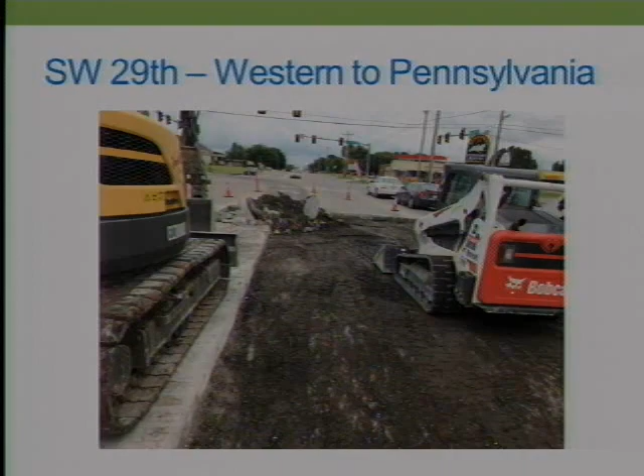I wanted to start with Southwest 29th, Western to Penn. If you recall, this is a 2-mile stretch on Southwest 29th. It goes from Penn to Western and Western to Shields. This project is substantially complete. The only thing we're really waiting on is to finish up some of the striping.

This was a challenging project because, remember when I talked about the different typical sections, this one had a bunch of different typical sections. You have a lot of concrete, full concrete streets, some concrete streets overlaid with asphalt, and then some just full asphalt. A lot of these roads, when they first have a 2-lane, they leave a lot of that stuff that's there, and then when they widen to a 4-lane, they leave the 2 lanes that are different, and sometimes those 2 center lanes will be different than the 2 outside lanes.

So we try to catch that in all of the pre-construction information that we gather. We try to pothole that and figure that stuff out, so we know what we're dealing with before we get in there.

But once we expose a lot of that stuff, we figure out where the patches are needed. This particular project has a lot of drainage on it, so there's a lot of inlet repairs, curb and gutter, making sure there's no standing water.

We also had a cross drain that had issues, which slowed things down a bit, but we got all those things addressed, so it's nice to see that project progress the way it is. Currently it's been repaved and restriped, so hopefully we'll get to add that to the completed list, those 2 miles.

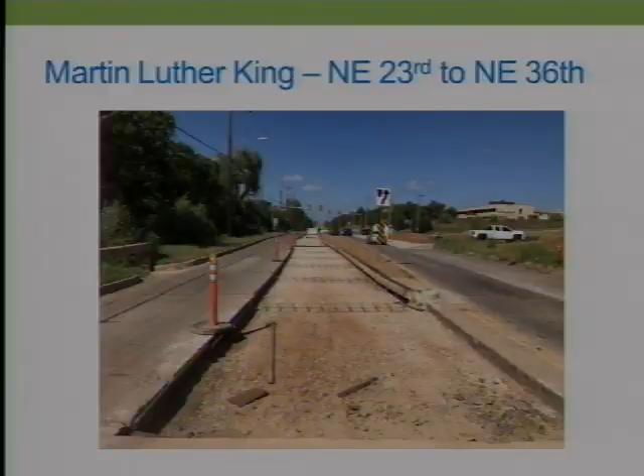This particular project is a good one also, because at Northeast 23rd and Kelley, if you recall, this is one of our street enhancement projects that was approved, and it crosses through MLK all the way down to the Katy Trail on 23rd. So that's a nice tie-in, to get this resurfaced and tie in to one of our street enhancement projects.

And then Northwest 63rd, Santa Fe to Kelley. We had a lot of patching on those, so we did a lot of patching, and it's your typical mill and overlay. You can see on the left side of that picture, the milled surface, and on the right side, they're repaving everything. Hopefully that one will be complete pretty quick too. It looks like they're progressing on that one.

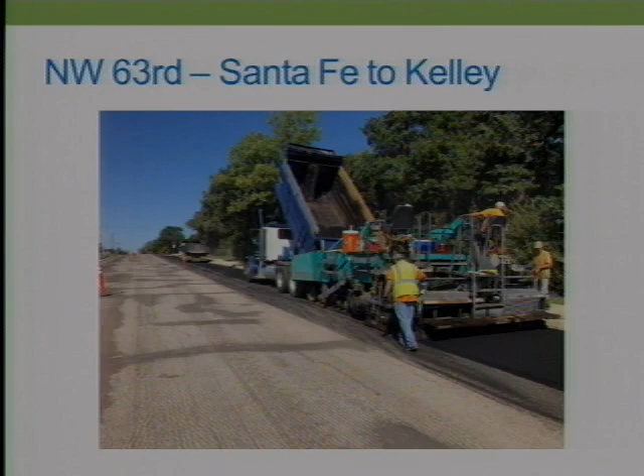Northeast 63rd, Midwest Boulevard to Douglas Boulevard. This was not a mill and overlay, this was more of an overlay project. If the asphalt looks good and seems to be holding up structurally sound, and if there's no curb and gutter and we can add structure to that, we always try our best to overlay it. There was some curb and gutter around the bridge there, so we did a little bit of edge mill to tie that in, but anytime we can have the opportunity to add structure, that gets us closer to our city standard typical section for arterial streets.

And here's one of the neighborhoods going on. We obviously saw a pretty bad area on this one. This particular project, same thing - we'll try not to do any milling, we'll just try to add structure to it. There are some areas of this neighborhood that are in a little better condition, so we'll overlay that part. But in areas like this where it's just gone too far, we'll do more of the full reconstruction like I talked about. We'll incorporate that asphalt into the base, stabilize that material, and come back in with an overlay to tie all that structure together.

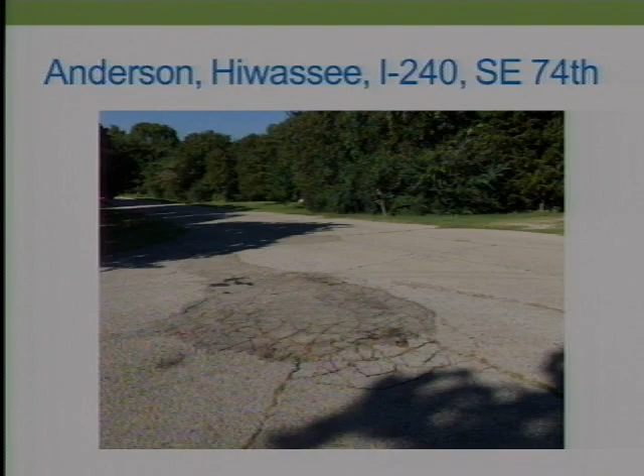And here's another one, Anderson, Hiwassee, I-240, Southeast 74, another residential resurfacing project that we have. This one has a lot of transverse cracking, and on those transverse cracks we try to go in there and crack seal a lot of that stuff and make sure there's no voids, get that cleaned out. In areas where we can just overlay that, that'll be kind of our start of the patching process and transverse crack repair. We'll repair all those things, and then overlay that. This neighborhood also has a few areas that'll probably be full reconstruct, but they've started, and hopefully we'll progress on.

That kind of ends that. If y'all have any questions, I'd be glad to answer those. I have a couple of questions.

So basically, either a full reconstruction is done or mill and overlay. What would be the longevity of life of each one of those?

A full reconstruct, hopefully we can get 20 plus years out of that expectancy. Your typical mill and overlay can go anywhere from 10 to 15 years, and we have a lot of areas that we've done mill and overlays, and it's 20 years later and they're withstanding in real good condition. As long as we can get that sealed off, the idea is as long as we can keep the moisture out of the base, and usually that's what the mill and overlay does.

It's structurally sound material, but weather comes in, and the oil oxidizes a little bit, and you'll get a little bit of cracking, and that opens it up and lets moisture in. If we can get to that and do that mill and overlay, we can get that sealed back off, and it's structurally sound, so you don't have any potholes or anything like that. It will extend the life for a long time. As long as we don't get that weather cracking again, it can extend it for 10 plus years.

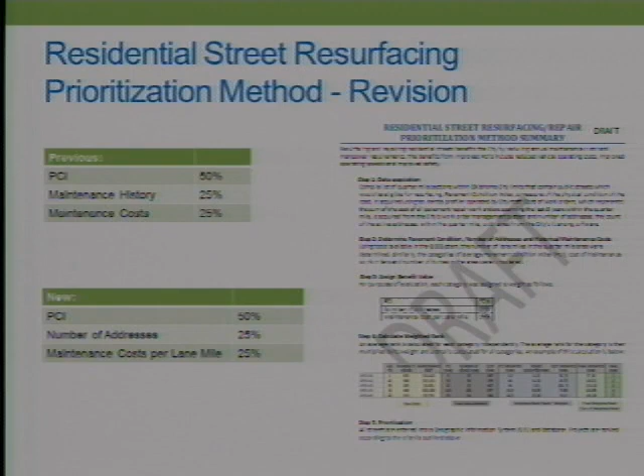As we have maybe neighborhoods that have similar PCIs and neighborhoods that have similar maintenance costs, the neighborhoods that are more dense—i.e. the ones that have possibly higher traffic—we do not measure traffic volumes of residential streets. This might be our way of getting back to measuring the higher use streets for that measure.

You'll see that the percentages have not changed, but the way the methodology works is the same. We can take those PCIs, number of addresses, and maintenance cost, rank them, weight them. We then sum those totals and create that new rank system.

This is going to allow us to present future lists to you as an advisory board for recommendation for additional sales tax dollars moving forward.

There's a few other things we're able to do with the GIS that we mentioned, and one of the biggest changes in the residential is we're going to be looking at quarter section or quarter mile. We had previously used square miles, so all the future lists we have are going to be much more neighborhood centered.

It doesn't necessarily mean that all neighborhoods in a mile need to be resurfaced—we can focus down a little bit finer. With that, I'd like to open up for questions if there's some questions about the proposed changes.

What we would do next is, if there are no changes, we would put this on for a future meeting to go ahead and adopt the revised prioritization, and we would then start presenting future lists using this methodology.

Any questions? Eric, I have a question. So the main difference is taking out the accident situation on the arterial. From the arterial, yeah. Is there a concern about that? Is there any way to put that back into a program situation? Because obviously we felt it originally was important to use that as a barometer.

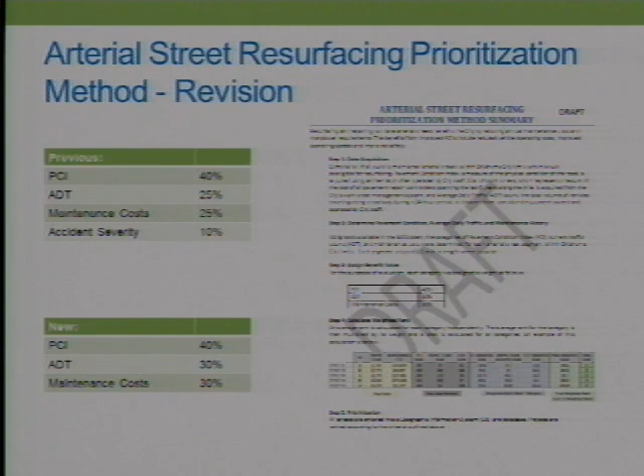The new weighted rank, in addition to the change we're talking about with the software—if you look at that next to last column, the light green column on your form—you'll see that we actually get a more fine creation of the rank. We're going to be able to come to you with better justification that these are the actual ranks: first, second, third, and fourth. We can get to a decimal point with the new weighted system.

So, with that said, I don't think we're going to see an actual impact in the way the streets are listed. Now, all those that had that same 4.7 score, we may see some change inside those with the new system, prioritizing the ones that create that finer score. But again, they're all going to fall near that top of the list still. They're not going to fall to the bottom of the list with the change.

I think the other thing we're going to be able to do with the arterials—previously we were looking at bond streets, specifically bond recommendations that came out of the bond program. The next list that will be coming to you will look at all streets in the entire city network. So no longer will it be just those bond streets. With this new software and some of the methodologies, we're going to look at every street in the system regularly. So there may be some streets that weren't reported previously as being poor that through this new system are going to probably elevate themselves into the list. Just because we didn't get a call doesn't mean it shouldn't be considered or done.

So I don't think you're going to see a lot of impact, and with the adoption, one of the things we can do is show you what that new list looks like. So before the board considers recommending an item for the council to approve, you'll actually be able to see that list, and if it would be helpful, we could show you what the old list was and the new list, and you can make that comparison. So I hope that answers your question. Okay.

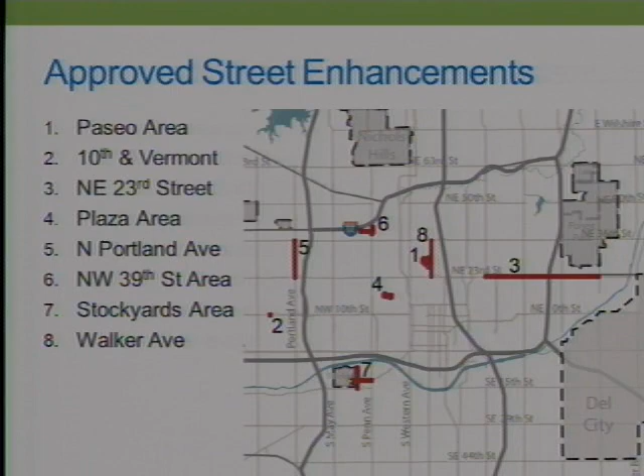I want to remind you of the projects that have been approved thus far. The 8 that you see here are the ones that have been selected with the first half of the street enhancement funding. The Walker Avenue project was added on, I believe, at the last meeting.

I'm going to start with the Paseo area. It is bounded by Northwest 30th Street on the north side, Northwest 23rd Street on the south, and Shartel on the west, and Harvey on the east. That's a pretty broad area. A lot of the focus, though, is going to be pretty much along Paseo Street, Walker area, and there'll be some focus also along Dewey and Northwest 28th, at the intersection of Northwest 28th and Paseo.

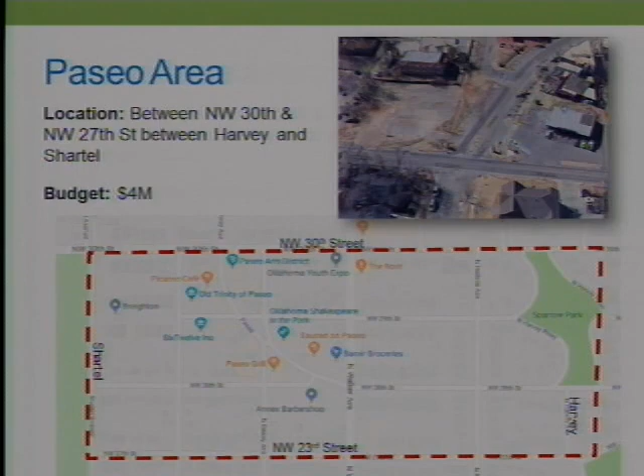This project has a $4 million budget. And the status of this project includes quite a bit of meeting with stakeholders. This project is coordinated by Kim Cooper Hart. She is the project coordinator, and she and other staff have spent quite a bit of time meeting with stakeholders, kind of getting a preliminary idea of the scope of what the main needs are.

Some of those primary goals include upgrades of crosswalk access, improved walkability, stormwater management. And the key thing here in this area is that we want to maintain the character. So it will be quite hard, some challenges there in maintaining the character, but also upgrading walkability, accessibility for sidewalks, and including the stormwater management.

Another challenge in this area will include coordination, given that there's the Friday events in the area and the annual festival. So there will be quite a bit of time taken here continued through the scoping phase to make sure that that is coordinated efficiently. This project has been advertised, and so the next stage of this project will be to go through the interview process for the consultants.

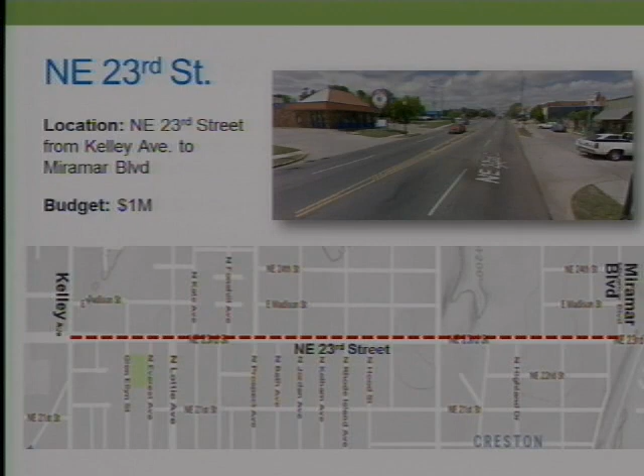Northeast 23rd Street is the next project. The boundary of this project extends from Kelley to Miramar. Brock mentioned this project earlier. It's about a 1.5-mile corridor, 4-lane principal arterial with a budget of $1 million. Some of the primary goals here are to upgrade the crosswalk access and improve walkability. And there's also potential for connectivity to the Katy Trail that is near the Miramar intersection area.

One keynote here is that we plan to begin stakeholder involvement after tomorrow's election. We wanted to make sure that the new council member is involved in the stakeholder process. And so this one is still at the preliminary scope phase and may not be advertised. It's one of those ones that we are trying to identify some low-hanging fruit. 10th and Vermont is also one of those projects that may not have to go through the full design phase. It may skip some of those key elements that Aubrey mentioned earlier and could either be an on-call contract or some of the design could be done in-house.

Plaza area, the extent of this project is basically between Kentucky and Blackwelder Avenue. It's about a 1/4-mile corridor on a major collector. Here, the goals are really to improve accessibility, upgrade crosswalks in this area.

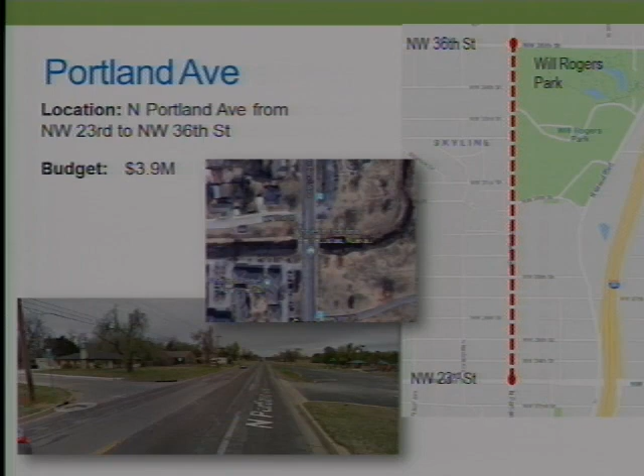Portland Avenue is the next project. The limits on this project are from Northwest 36th Street on the north side down to Northwest 23rd Street. It's approximately a mile-long corridor on a 4-lane principal arterial. It has a $3.9 million budget.

And one of the key elements here for the primary goals is to look at doing signalization at Portland somewhere near the 31st intersection, which is right across the street from the park in that area. There are residences on the west side, and they have expressed a desire to get better connectivity to be able to cross over to the park, the Will Rogers Park on the east side.

This project has been advertised, and the next phase for this project will be looking at also interviews for hiring a consultant.

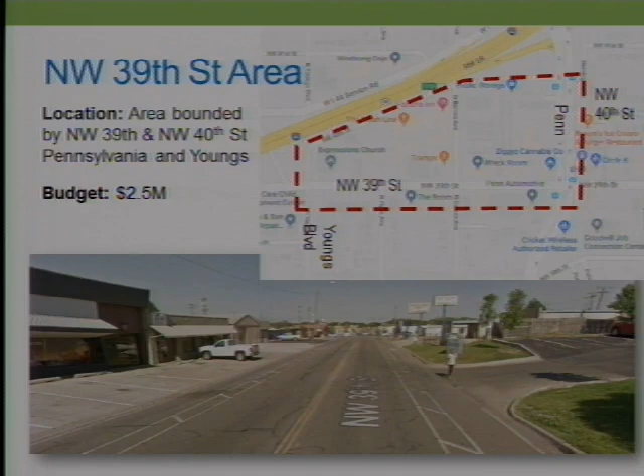The next project is the Northwest 39th Street area. It is bounded on the north side by the I-44 highway, on the south side Northwest 39th Street, to the east Penn, and to the west Youngs Boulevard. This project mainly is looking at safety and improving walkability and accessibility, improving lighting in this area. Multiple meetings have been held with stakeholders and city staff in this area. It too has been advertised and will be put out for interviews very soon.

The next project is the Stockyards area project. This one is bounded on the north side by the Oklahoma River, on the south side down to Southwest 15th Street. A lot of the focus on this project will be along Agnew and Exchange, pretty much looking at the intersection of Agnew and Exchange. The project has a budget of $3.5 million, and the stakeholders in this area have expressed a desire for some traffic calming. There has been quite a bit of stakeholder involvement with this area, also with city staff and the business owners and property owners there.

This project too has been advertised and will be in the same group of projects that will go before for interviews.

And the last project is Walker Avenue. The limits of Walker Avenue is from Northwest 36th Street down to Northwest 23rd Street. It's close to a mile long, and it is a minor arterial, 2 lanes. The budget for this project is $3 million. Some of the primary goals for this project are, again, to improve walkability and accessibility. There's a large stormwater management component for this project also. One key thing with this project is it does connect the Paseo area down to the Uptown area, with quite a few residences along the corridor.

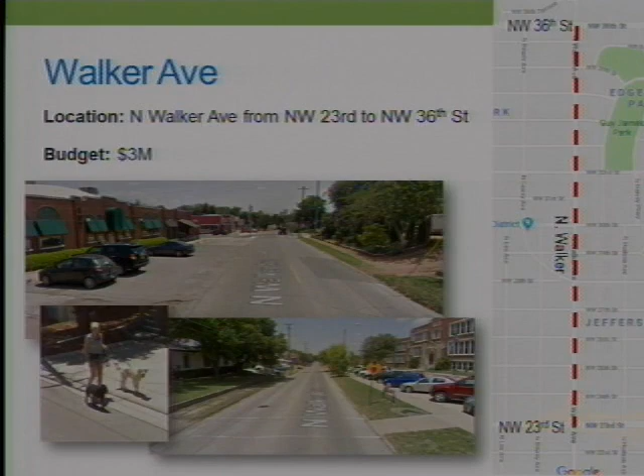Okay, in this area, this particular project is the Walker project. I know it extends down to the Northwest 23rd area where there's quite heavy traffic, a very heavy retail area. So some things that could be included, for example, as Mr. Johnson mentioned here, changing the turning radius, sometimes that can slow down traffic. Changing some of the elements along a corridor can help either slow down traffic or make it more visible for pedestrians. Sometimes elements could include on-street parking or changing of on-street parking, chicanes. There are different elements that could be included, and that's where we'd look to the consultants to help identify the best alternatives to implement in these areas. So Walker is one; I believe the Plaza District might be another area, particularly where there's high pedestrian crossings and access. Anything else?

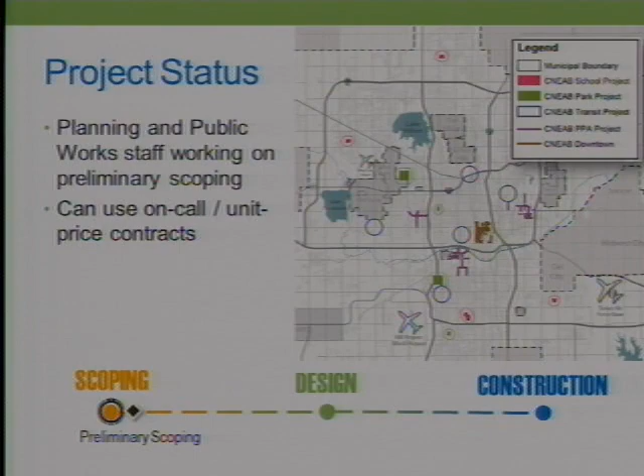Aubrey talked about the different approaches, the different procedures. There's the in-house or on-call contracts that can help us save a bunch of time and a bunch of money. Particularly with sidewalks, we want to really stretch these dollars as far as we can, to make sure we're putting in as many sidewalks as possible.

So that's the stage we're in right now. The project team is going out, evaluating the project lists, and determining which ones are going to need special attention with regard to right-of-way acquisition or utilities or significant surveying operations.

We'll be coming back to you with that divide: what projects do we actually need to put out for an outside consultant to come in and do some engineering and design. For those we don't have to do that, that's great, and that'll help us stretch our budgets even further.

Any questions on the sidewalks? Okay, we'll move on to the bicycle facilities then.

It's a very similar process. James and I will be the staff members working on that, and we're actually working with a different firm for this, Atkins. We're partnering with Josh Malwick, a professional engineer with Atkins, and we've recently had a long get-to-know-you type meeting with Atkins and established what our processes are going to be, and laid out what our goals are for our bike projects.

So these projects are laid out in the bike ped plan and in our project lists, and we've been internally gathering information to figure out how best to roll these projects out. A lot of these projects are on streets where the road surface may not be up to par, and we don't want to put a bike lane where the road surface makes it impossible to ride. So we're looking at overlaps with projects from the 2007 bond, the 2017 bond, or this program, where we can have projects come in together, and our bike project may end up being just a restriping, since that road getting resurfaced would need to be restriped anyway. That would help us do these projects much more affordably. For projects with a resurface need where there isn't an existing project, we're looking at how we may have to modify our budgets to accommodate that.

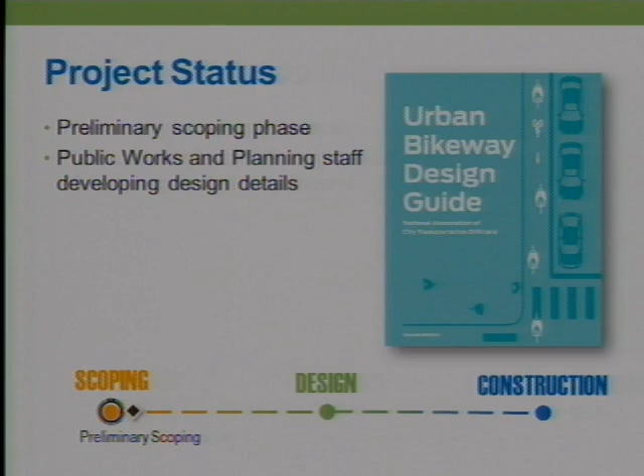This is a field that has been developing very rapidly over the last 10 years. What was best practice 10 years ago is not today. So we want to make sure we don't use a facility design that doesn't accomplish our goals for safety. We'll be looking at things like NACTO - the National Association of City Transportation Officials. They've been producing documents such as the Urban Bikeway Design Guide that lay out some really good examples for how we could be doing our facility design.

Certain guides lack specifics about how to handle bicycles in intersections, and that's something I'm especially cognizant of - making sure we're facilitating those movements for cyclists where those conflict zones are. Just putting paint isn't necessarily enough if it's not really facilitating safe left-hand turns or right-hand turns.

Any questions on the bicycle facilities?

Okay, we'll move on to our trails then, split between existing trails and new trails. For the existing trail facilities, our team includes the MAPS department, the Parks department, and CEC again. I don't believe any of them are here today, but this will be our team. Brandon's here? So we have a representative from our Parks department, and they'll be using their trail wayfinding plan for those existing projects that were wayfinding projects - this is the list of those projects where they'll be doing improvements both in signage and resurfacing.

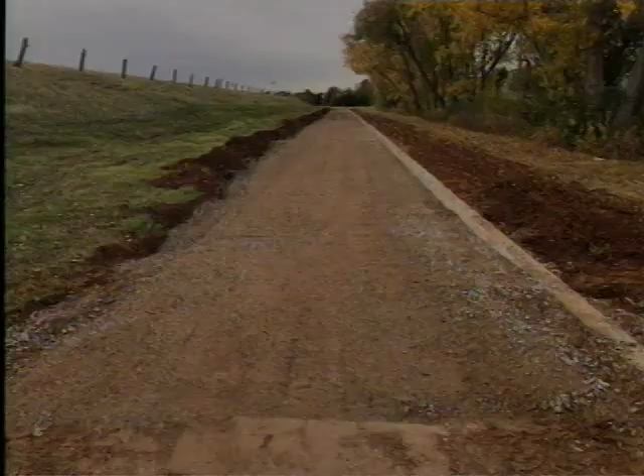They're currently in phase 5 working on that. They also went back to phase 1, where we discovered an area that really needs a full reconstruction. This is the area here - there's a lot of elevation changes and bumps. So we thought it'd probably be best to go ahead and reconstruct all that to make sure we get a good base.

Here's an area where they've got it torn up. You can see they've already put the aggregate base, and they're going to bring that back up.

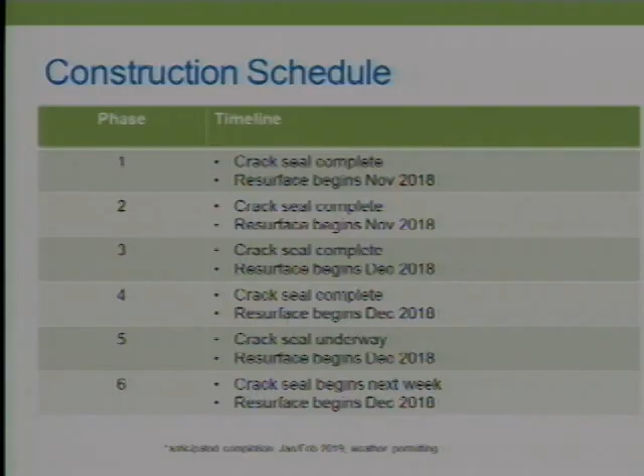Jump back to my phasing plan here. As they move through this, they should finish phases 5 and 6 with all the crack repairs in the next couple of months, and then they intend to get the full reconstruction done about the same time they finish with all the crack seal. Hopefully we'll get that resurfaced as quick as possible, and hopefully have that done in December, before January. They're making a lot of progress.

A lot of this, of course, is weather pending - asphalt and even the crack sealant repair stuff is temperature sensitive, so we have to make sure we have good temperature days and the surface is at the right temperature. But if we can avoid a lot of moisture and get some good sunny days, then they'll be able to progress on that and hopefully be done January, February.

Any questions on the construction on that?

Brock, on that one area, the slide where you're reconstructing - yes - which is on the west side of the roadway. Yes. Is that just south of Britton Road, I believe? Yep, correct. The thought has been that area got so waffled because of the tree roots. There's a line of cottonwood trees not very far to the west of the trail.

You resurface it - how does it, if it is the tree roots creating that damage, how does that work toward the future? One of the things we did in that area, we think that was a cause of that. Those roots, as they grow, may not just be in the base, but right underneath the base.

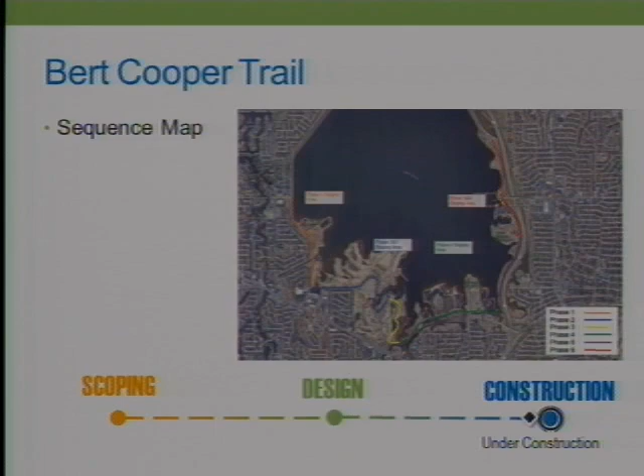The north section, what's used as a trail, is actually a lake access road for lake maintenance, maintained by the Water Utilities Trust. I do know the Water Utilities Trust director has been approached about possible improvements to that road, but it would be a project outside of Better Streets, one the trust could consider.

That will basically not be any of the stuff we're dealing with—they have to decide to spend the money on resurfacing or repair work. If we had pictures of that, it really is a road and not a trail. The pictures Brock showed you are more trail-like in nature, specific to bicycles, runners, and walkers.

That north section across the dam is vehicular rated—more of a streets-based project than a trail-based project. It's used differently. Trail riders do use that section, but it's outside the scope of the project we approved here. Going counterclockwise, there's a delineation where cyclists and trail users would be on the far outside, away from the lake.

Let us continue to work with the utilities director on that portion. There are still some conversations about the request—it's not specific from the Better Streets Advisory Board, but a lot of Lake Hefner Trail users have made that same comment. Okay, good, thank you. Any other questions?

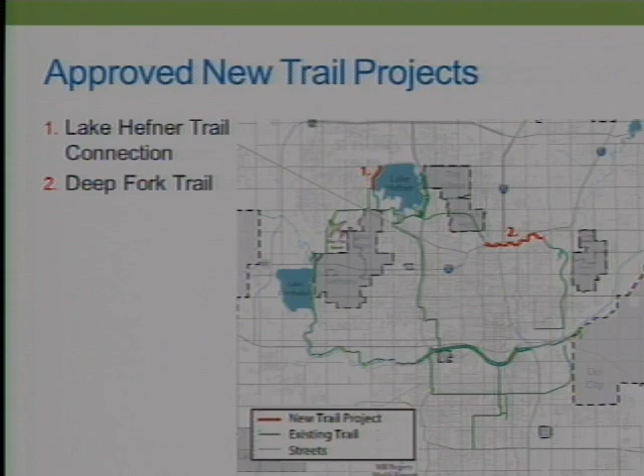Okay, so I think this slide got out of order. But basically, the Deep Fork Creek Trail is the biggest gap in our trail network right now. This is a project that's been under works for more than a decade. It's a very challenging alignment, and we'll get into that a little bit more.

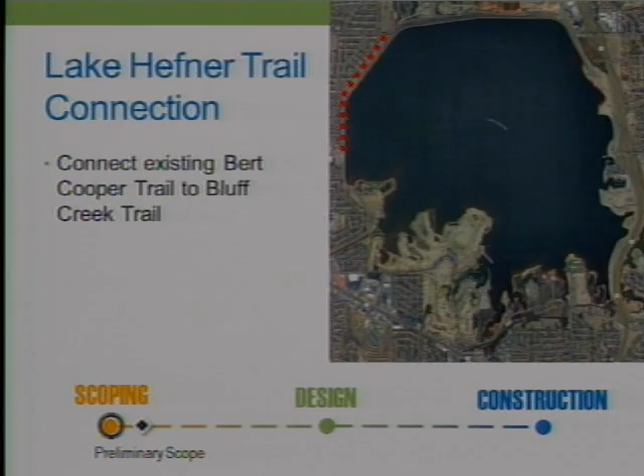So actually, I'm going to talk first about the Lake Hefner Trail connection. Like Eric said, the road along the north side of the dam functions as kind of an extension of the trail. There's a bike lane on it, used for all different purposes: driving, cycling, running, fishing, all sorts of things. What we have, though, is the Bluff Creek Trail network to the north of the lake, which actually does connect around back to the dam road further east.

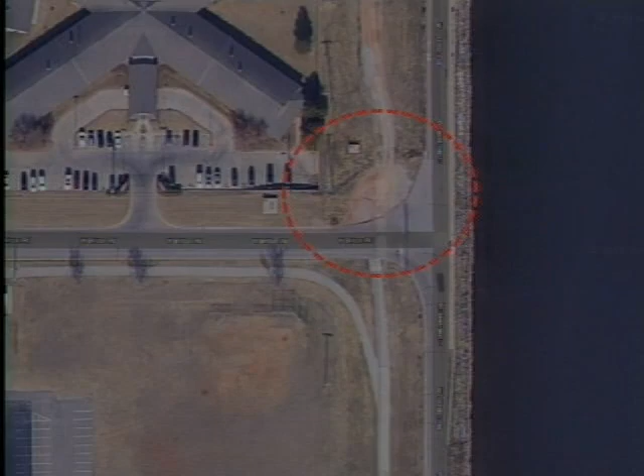So this project is going to give us the opportunity to extend the trail network in a way that allows people to not have to use the dam road should they choose. Right now at Britton Road, the Bert Cooper trails terminate, and to the north of that we have an existing utilities gravel road. This is where you would transition to Lakeshore Drive and continue on around the lake.

So the idea is that we would be able to connect this up to Hefner Road and take advantage of the existing full-stop intersection at Hefner Road and Ann Arbor Avenue to get you to that existing trail on the north side there. We're also looking, in this other red circle, at the ability to have this facility go up to Lakeshore Drive up here, so that if you were on this trail, you wouldn't have to go all the way down to Britton Road in order to get onto the dam road.

Any questions about that before I jump into Deep Fork?

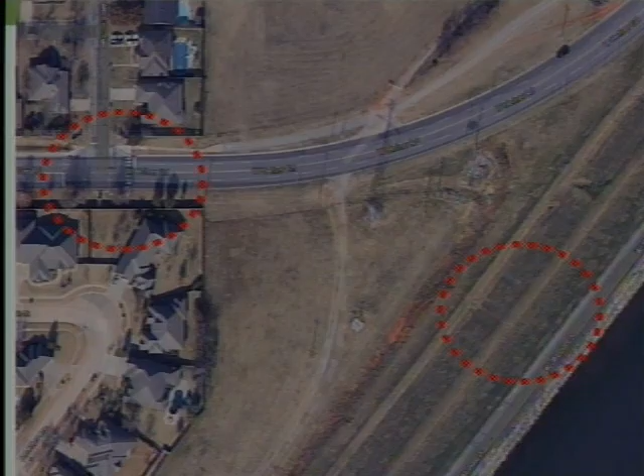On that, John, presently that's just sort of a gravel road. Correct. It will be then paved as a multi-use trail. We are scoping that right now to determine the feasibility, but that is the intent.

Okay, so the next one is the Deep Fork Creek Trail, and as I said, this has a long history. It's a very substantial project, the goal of which is to connect the northernmost point of the Katy Trail on the far east of this image to the southern tip of the Nichols Hills Trail, or the Nichols Hills city limit on the far west over here, and the North Grand Trail. Correct, yeah.

And so the project that was funded through the Trails funding is this phase right here, phase 3. This is a 5-phase project. I'm going to go through the rest of these. Phase 4 is covered by this committee as well in the bicycle project list. The project Shartel to Deep Fork includes a connection from the existing bike lanes on Shartel to this project, and that would include a bridge across the river.

And that's a way for people to get under I-44 without having to use Classen or Western, which are currently heavily trafficked with automobiles. If you've ever tried to ride across those, it can be very challenging. For our less experienced riders, it's really prohibitive in getting people across a major barrier. And that being one of our 4 primary goals of Bike Walk OKC is to make these barriers crossable.

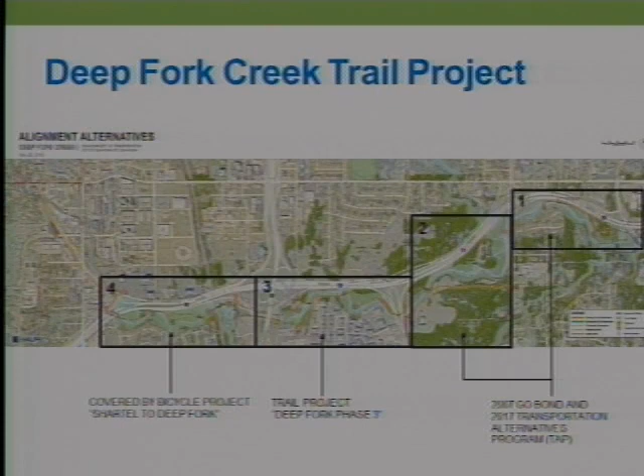Phases 1 and 2 of the project are funded by the 2007 General Obligation Bond, as well as funding that we got through federal grants in the 2017 Transportation Alternatives Program. And then Phase 5, which is on street and is not necessary to make this connection right now, is something we're going to go after funding in the future for. This whole project is around $11 million, and through these 4 phases, we're funding about 90% of that, and are going to be able to connect the northeast side to the inner upper loop, as well as north of I-44.

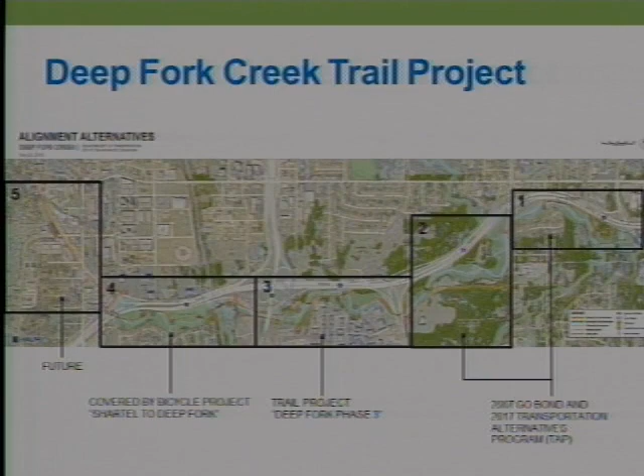So this is just kind of a zoom in of what this project is funding. That'll get us under Lincoln Avenue, Lincoln Boulevard, excuse me, and alongside all of this residential and the office buildings.

This project is further along than our other new trail projects because we have funding from 2007. We've already made a lot of moves on this, working with Halff Associates, and they've done an excellent job defining where we can have trailheads, overlooks, and where we'll need bridges, and that's how we came to our cost estimates.

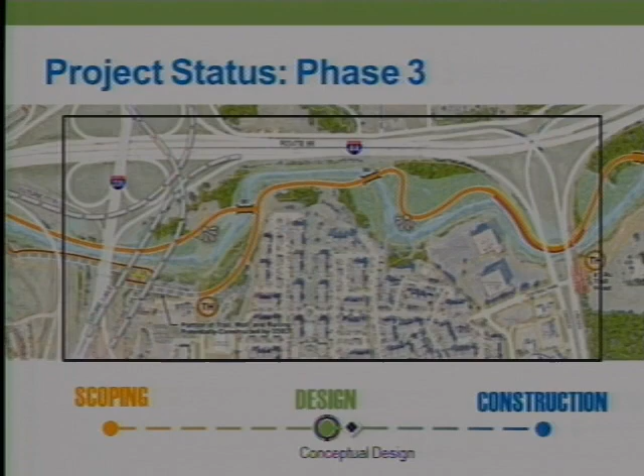This project is being project managed with ODOT, so there's a lot of overlap, which is very beneficial given the proximity to the interstates and having to go over and under all sorts of things that belong to them. They're extremely excited—this is a project they moved way up their list of grant-funded projects, so it's a winning project all around. Here's some photos.

Also, the alignment goes right by the interstate. We've done some site visits, and my initial concern was that the noise would be completely overpowering, but it really isn't, and I'm not entirely sure why—it could be all the vegetation. But it's actually a great opportunity because of all that existing right-of-way plus the natural features in the area.